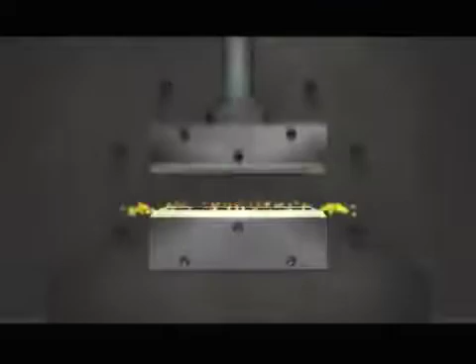Hi, I'm Larry Postlethwaite, President of the Crosby Group, and I take great pleasure in introducing you to our company through this series of video presentations. In large measure, these videos are about quality, Crosby quality, quality from the way our products are designed to the way they are manufactured and distributed. Let's look briefly at what we call Crosby quality.

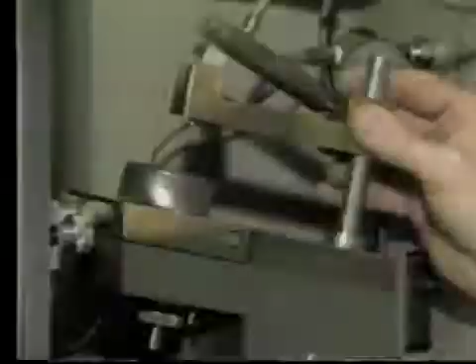Crosby means quality first in research and development, using one of the most experienced technical staffs and best equipped laboratory facilities in the industry. Crosby R&D is constantly developing new or refining further products to expand the performance of our product line. Crosby also stands for quality in engineering and manufacturing. All Crosby products are engineered to provide performance that often exceeds industry standards, and Crosby products are manufactured and tested stringently to ensure their reliability.

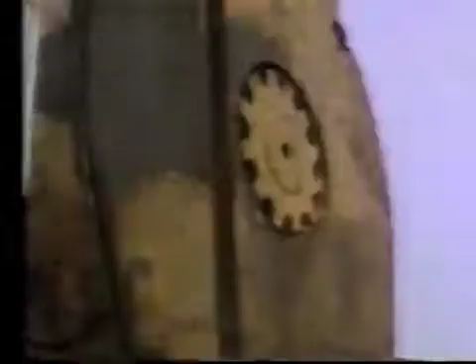Our quality is also reflected in the depth of our product offering. The Crosby product line is truly a complete product line. From scaffold pulleys to the largest load lifting blocks ever made, from the smallest world-famous Crosby clip to the largest wire rope sockets made, from a 1/3 ton capacity shackle to the exclusive 1,500 ton capacity wide-body shackle. Truly a full line of products for handling and securing loads.

Crosby quality also extends to our relationship with customers and end users. Crosby customer service is constantly striving to become among the most responsive in the industry. We stand ready to answer your purchasing questions as well as supply technical information about products.

And finally, Crosby means quality to our valued distributors and end users in terms of liability prevention. Load-rated products, product traceability, and training videos are a few features used. We believe Crosby quality must also extend to product warnings, ensuring that men and women who use Crosby products can use them with confidence. Remember, when buying Crosby, you're buying more than product, you're buying quality.

The following program is on the basic principles of block and tackle. One of the most effective work systems for moving loads is the block and tackle. Certainly not a new work system. They were key to building the pyramids a few thousand years ago. Block and tackles are among the most frequently used work systems today.

This training video will familiarize you with the basic principles of block and tackle systems, how they work, and how to select proper components to ensure your safety and the safety of your load. The information we'll discuss in this video has been available from the Crosby Group in our publications for many years. We're providing it here in video as a further service to our customers.

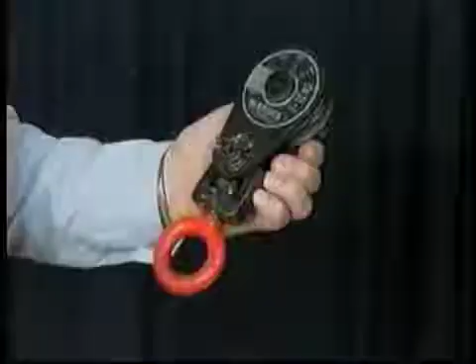The word block refers to the part of the work system you see here. The block consists of one or more sheaves or pulleys within a holder or housing which may have an eye, hook, shackle, or hanger attached to it. The sheave or pulley inside the block housing is a wheel that rotates about its center pin or axle.

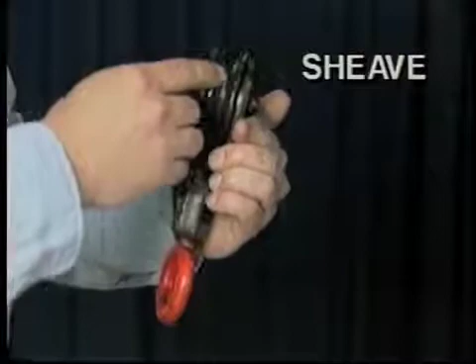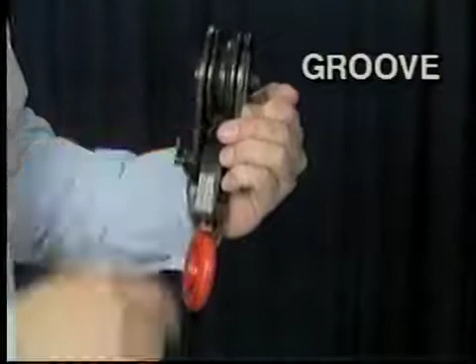Another important part of the sheave's design, and one that plays a key role in maintenance and inspection of a block and tackle, is the groove around the outside of the sheave that you see here. The purpose of this groove is to support the wire rope, which we call the line, and keep the line from slipping off the sheave.

The term tackle in a block and tackle system refers to any parts of the system outside of the block. So, such equipment as hooks, shackles, slings, eye bolts, wire rope, and so on are all referred to as tackle. While we're defining block and tackle terms here, there are two others you need to be familiar with. These are reeving and pitch diameter.

Reeving is the physical arrangement of the wire rope or line from one block to another and to the power source, such as a winch, being used to lift the load. Pitch diameter means the diameter of the sheave at the lowest point of its groove, plus one rope diameter.

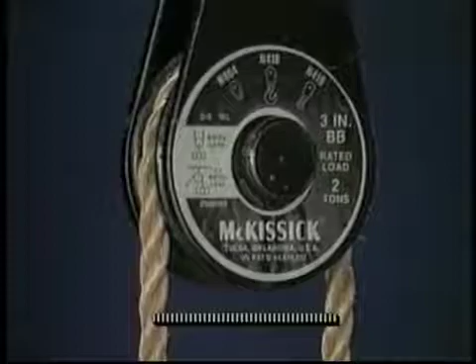Another way of thinking about or measuring pitch diameter, then, would be from the center line of one rope end to the center line of the other rope end as it goes around the sheave. As we'll discuss later, pitch diameter is key in terms of the stress placed on the wire rope as it bends around the sheave. The sharper or tighter the bend, the greater the wear, and therefore the shorter the life of the wire rope. To extend the life of wire rope, we increase the ratio of pitch diameter to wire rope size.

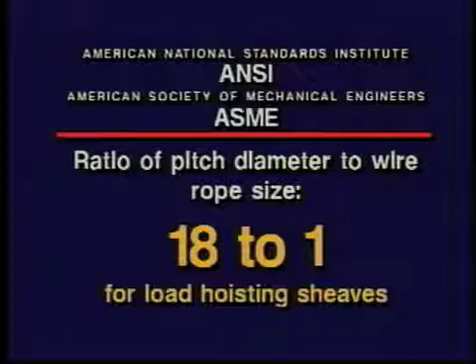For example, the American National Standards Institute, ANSI, and American Society of Mechanical Engineers, ASME, Joint Safety Standard calls for a ratio of pitch diameter to wire rope size of 18:1 for load hoisting sheaves. Now this, of course, is a general guideline for a specific application. We recommend consulting with your wire rope manufacturer.

Now that we've described the parts of a block and tackle system, let's look at how the system can be arranged and used safely and effectively to increase the result of our effort, giving us what engineers call a mechanical advantage. The advantage of using multiple sheaves in a block and tackle system is that we can combine them in various ways to create a variety of work systems. In a nutshell, the more sheaves we use correctly in a block and tackle system, the more we can increase the result of effort. We'll discuss and demonstrate the effects of multiple sheave systems a little later.

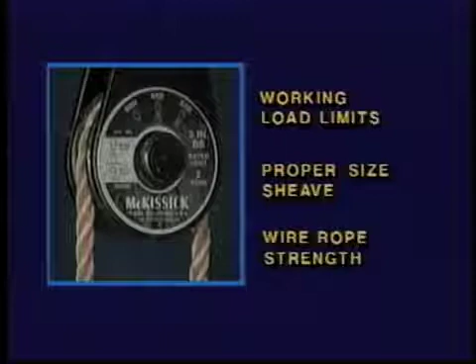For now, let's make sure we fully understand how a basic block and tackle works by looking at a single sheave block. Please pay particular attention to the safety aspects of our discussion as we go along. Remember, a block and tackle system is effective only to the extent that it is safely designed, used, and maintained. The single sheave block and tackle system is the simplest in design and probably the easiest to understand. Even here, however, care must be taken. We must select blocks with proper working load limits and proper size sheaves, as well as wire rope of proper strength, size, and other tackle parts to avoid an accident or damaged load.

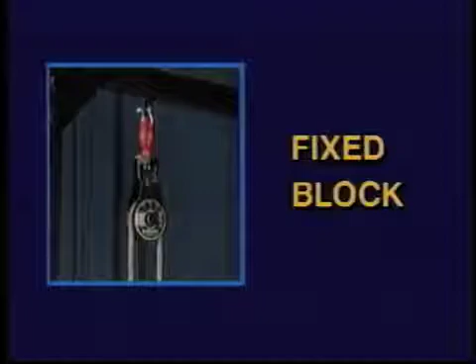If we decide to attach the block to a solid support beam, as you see here, we call this a fixed block design. Now, as we'll demonstrate in a minute, this block and tackle system does not increase the result of our effort. That is perhaps a simple but important fact to understand. If we're trying to lift, say, a 300-pound load, as we're representing this to be here, we're going to have to provide 300 pounds of force to lift that load. You might ask then, why even use a single sheave block and tackle? The answer is because it will give us an easier way to apply that 300 pounds of effort.

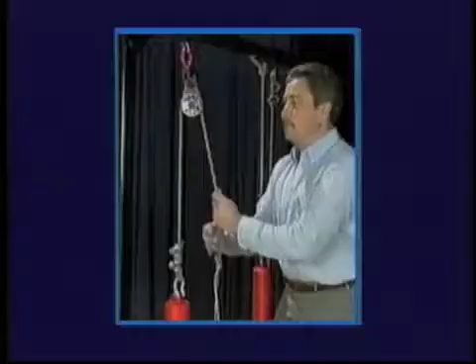In the demonstration you see here, pulling down is easier than pulling up. Much like the way those of you with farm experience learned that lifting bales of hay up to the loft was easier when using a block and tackle. Many other applications of this same principle are used in shipyards, construction sites, manufacturing plants, and so on. This design allows us to remain on the same level as the load and pull down, a far easier use of our effort than getting above the load and trying to lift it up directly.

While accidents can result from poor inspection or maintenance practices, like working with worn ropes, damaged sheaves or blocks, disfigured hooks, and so on, accidents can also result from selecting the wrong capacity blocks or tackle to begin with. That is, failing to use the proper capacity winch, choosing wire rope with too low a breaking strength, or selecting the wrong capacity blocks or sheaves.

Looking again at our demonstration model of the single sheave fixed block design, and remembering that we're representing the load to be 300 pounds, what minimum capacity block should we use? What do you think? Should our block be able to support a minimum load of A, 150 pounds, B, 300 pounds, or C, 600 pounds? If you answered C, 600 pounds, you're right. In this case, our block will have to support a minimum of 600 pounds of weight or force.

Now, if you answered incorrectly, don't feel all alone. Many an experienced mechanic or tow truck driver or weekend sailor has made a similar wrong decision where it counted, on the job. Let's take a closer look at our demonstration model to see why the block in this case must be able to support twice the weight of the load. Notice what is happening here.

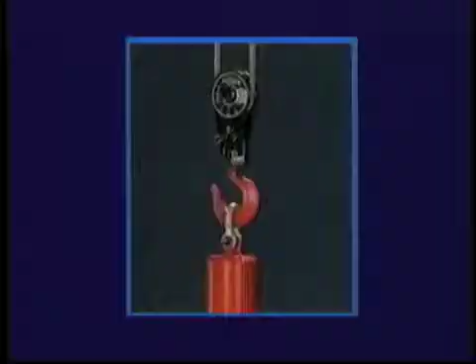Now, let's take a look at a second single sheave block and tackle design that demonstrates this point. Here, as you see, our block is not fixed to a solid support, as it was in our first demonstration. Instead, we've attached one end of our line to a solid support. We've reeved the line around a single sheave in the block, which in turn is hooked directly to the load. We're applying our effort by pulling up on the other end of the line. What we have now is a traveling block single sheave design.

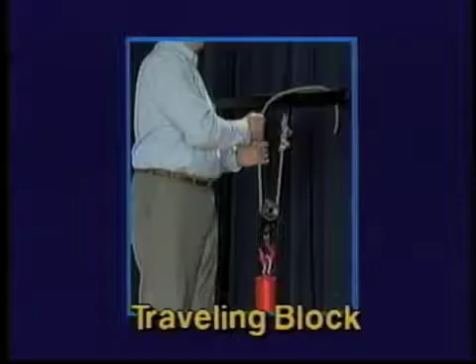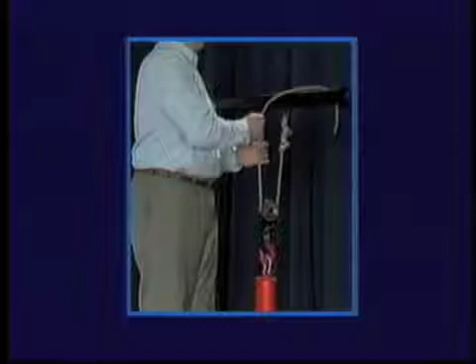In terms of the effort required to lift the load, this block and tackle system has a distinct advantage over our first example. Before we demonstrate this advantage, can you see what it is, based on your block and tackle knowledge thus far? If you answered that this design will require only half as much effort to lift the load, you're right. If you look carefully at this operation, you'll see that as we pull up on the line, the traveling block and load are moved up as well, and we're moving the load with half the effort, because the other part of line we fixed to our solid support is supplying the other half of the effort required.

Now, rather than having to apply 300 pounds of force to lift the 300-pound load we're representing, we only have to apply about 150 pounds of force. The fixed line is applying the other 150 pounds. It's the equivalent of having another worker lifting the load along with us. We see then the importance of understanding parts of line when designing a block and tackle system.

Essentially, the more parts of line we use, reeved through a combination of blocks and sheaves, the greater amount of weight we can move with the least amount of effort. The overall amount of work done will, of course, remain the same. In our first demonstration, we moved our 300-pound load 1 foot by pulling 1 foot of wire rope with 300 pounds of force. Here, we've only had to apply 150 pounds of force. But in order to move the load 1 foot, we've had to pull 2 feet of wire rope.

There's a trade-off, then, in gaining this mechanical advantage. That trade-off is in terms of the amount of wire rope or line required to make the lift. This trade-off is small, however, compared to the great mechanical advantage this block and tackle system gives us. Specifically, you saw that in this second case, we've had to pull twice as much rope to move the load a certain distance as we did in the first case.

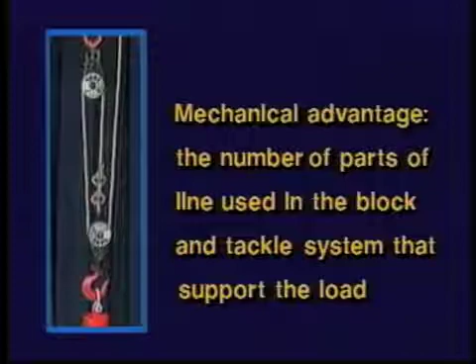A good working definition of mechanical advantage, then, is the number of parts of line used in the block and tackle system that support the load. The more parts of line we have directly supporting the load, the greater is our mechanical advantage.

For additional technical information on this point beyond the scope of this training, bearing friction, for example, please see Crosby's technical literature. For our purposes here, remember this parts of line concept when deciding upon your block and tackle system design. It's the parts of line that is key, not necessarily the number of blocks or sheaves used in the system. To reinforce this point, take a look at this block and tackle system.

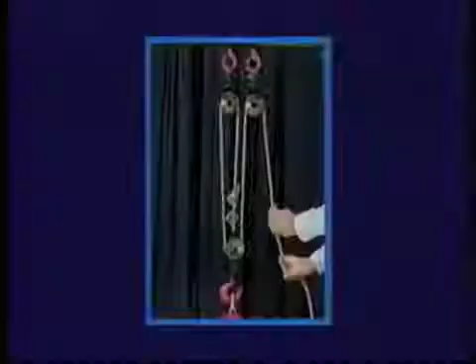Here, we've used 3 blocks, 2 fixed and 1 traveling, and our power source is pulling down on the line. Now, even though we've introduced another block and sheave into the design, we still have only 3 parts of line directly supporting the load. Both of these last 2 block and tackle demonstrations, then, used 3 parts of line.

Keeping in mind what mechanical advantage means, how much effort is required at our power source to move the 300-pound load we've represented? A, 300 pounds, B, 200 pounds, or C, 100 pounds? The answer is C, 100 pounds. Again, an overall total of 300 pounds of force is required, but now the remaining 2 parts of line supply 100 pounds each, making up the 200 pounds of additional force we require. We have multiplied the effect of our own effort 3 times.

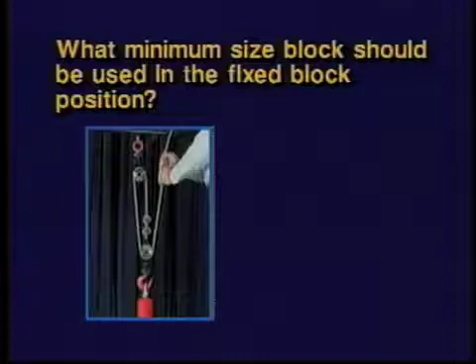In a few minutes, I'll give you a procedure, a formula, for deciding upon the parts of line needed for a given load. Before we get to that, however, let's reinforce some earlier points about the selection of proper capacity blocks. Looking at our first 3 parts of line design here, what minimum size block should we use in the fixed block position? A, 100 pounds, B, 200 pounds, or C, 300 pounds? The correct answer is B, 200 pounds, because that is the amount of weight or force bearing directly on the block, 100 pounds from each part of line reeved around the sheave.

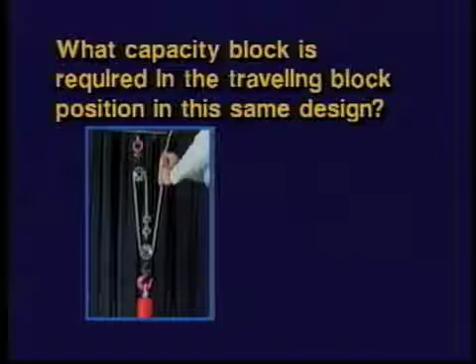Finally, what capacity block is required in the traveling block position in this same design? A, 100 pounds, B, 200 pounds, or C, 300 pounds? Here the answer is C, 300 pounds, since this block is directly supporting the load, which we've represented as 300 pounds.

Now, before moving to the last portion of our training on basic principles of block and tackle systems, let's take a couple of minutes to review what we've discussed so far. First, we use block and tackle systems to gain a mechanical advantage, to increase the result of our effort in moving a load. Second, we must use blocks whose capacity is equal to the total weight or force they will bear. That is, the force of the load itself, as well as the force coming from the power source as it pulls on the line.

Third, we must select sheaves whose pitch diameter is appropriate to the specific lifting application. This, as we stressed earlier, is an important safety consideration.

And fourth, we must use sufficient parts of line, sections of wire rope directly supporting the load, to accomplish the lift. Here we said 2 factors must be considered: 1, the weight of the load, and 2, the amount of effort we can expend. Using these 2 factors to determine the parts of line we should have is really quite simple, and it brings me to the formula I mentioned earlier.

To determine required parts of line, we just divide the weight of the load by the amount of effort available. For example, if we have, say, only 75 pounds of force available, and have a 300-pound load to move, as we've been representing in our demonstrations, we will need 4 parts of line. 300 divided by 75. Load weight divided by applied effort gives us the required parts of line.

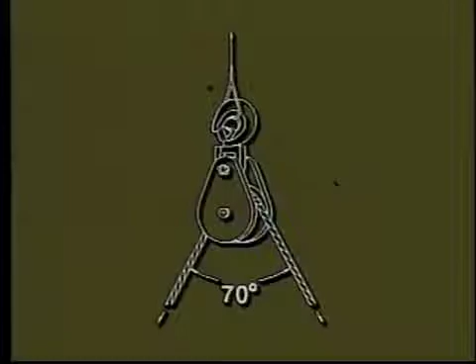Any angle less than 180 degrees, a straight line, is going to change the direction of force and the total load value placed on the block, either increasing or decreasing that force. In this case of 70 degrees, the angle will increase the force of the load by almost 2/3, 64% to be exact. So if we were lifting a load of, say, 1,000 pounds,

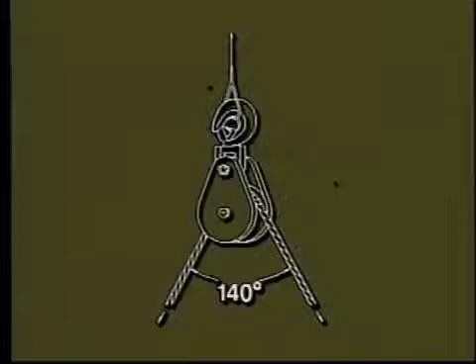the total load value on this block would be 1,640 pounds. On the other hand, if the angle between the incoming and outgoing line segments was double the earlier angle, that is 140 degrees, the load value on the block would be decreased by about 1/3, reducing our 1,000-pound load to a load value of 680 pounds. Now, if you're worrying about having to work out the math every time you're doing a job, relax. Engineers have done that for you.

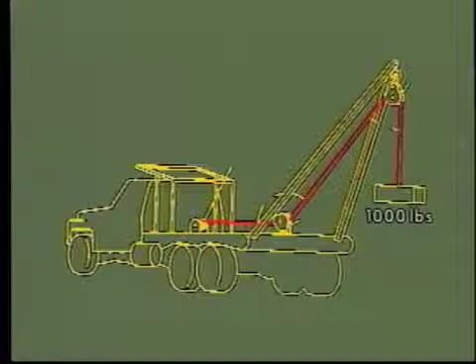Now, as you'll recall from our discussion on parts of line, this is a single part load line system. So we have no mechanical advantage. That is, the winch line pull will be 1,000 pounds, equal to the weight being lifted. Now with that knowledge, along with understanding the effects of line angle through the blocks, we can figure the total load value bearing on each block. To help us in this process, we'll use the angle factor multiplier table we looked at a few minutes ago.

Let's first consider the toggle block on the flatbed. Here we see that the angle between our line segments as they enter and leave the block is 135 degrees. Now before we look at our table for the specific multiplier we'll need, what do you already know about that multiplier? Will this 135-degree angle increase or decrease the total load value on this block? Right, it will decrease the total load value, almost as much as our earlier example using 140 degrees of angle.

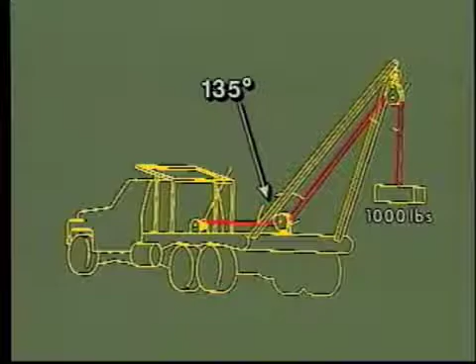In looking at the table, we see that the specific multiplying factor is 0.76. In other words, the total load on the tackle block in this system will be 760 pounds. We determined that by multiplying our 1,000-pound line pull on the block times the 0.76 angle factor from our table. Therefore, the working load limit rating of this block must be at least 760 pounds.

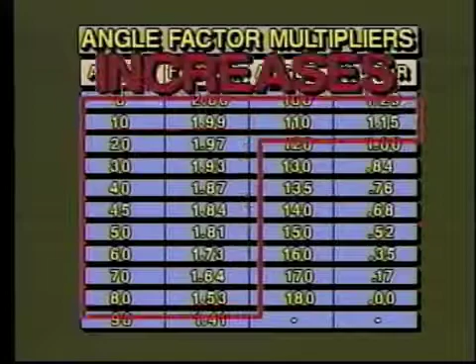Looking at the table a bit closer, you can see that any line angle wider than 120 degrees will decrease the total value of the load on the block, while angles narrower than 120 degrees will increase the load value. So, if you're going to remember one basic fact about the effects of line angle in a block and tackle system, this should be it. Any angle wider than 120 degrees decreases total load value on the block, and any angle narrower than 120 degrees increases total load value on the block.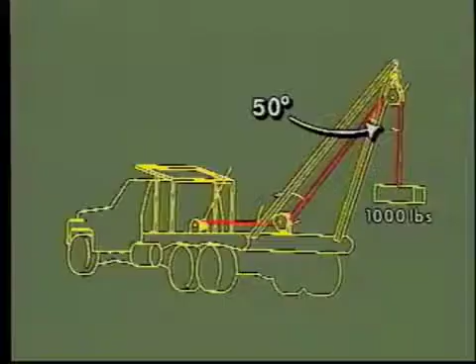To complete our discussion of the gin pole truck operation, let's look at the second block in the system, the snatch block at the top of the gin pole. Here, the angle between incoming and outgoing segments of line through the block is 50 degrees. We know already that this angle will increase the total load being supported by the block because the angle is narrower than 120 degrees. And as we see in our table, the load will be increased by a considerable amount, 81% to be exact. Now what this means, of course, is that the total force on that snatch block will not be just 1,000 pounds, the weight of the load itself, but rather 1,810 pounds due to the effect of line angle as it enters and leaves the block.

In practical terms, the operator of this gin pole truck is going to need a snatch block with a working load limit rating of about 2,000 pounds to pull that 1,000-pound car or whatever. Any less block capacity may ruin the block, damage the load, and most important, risk injuring a fellow worker or bystander.

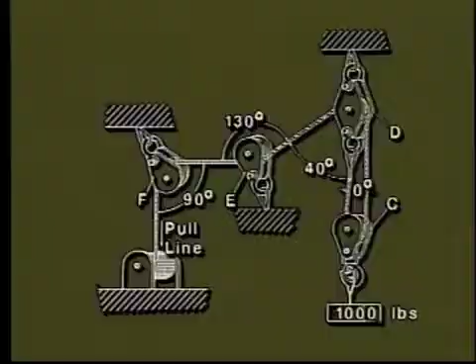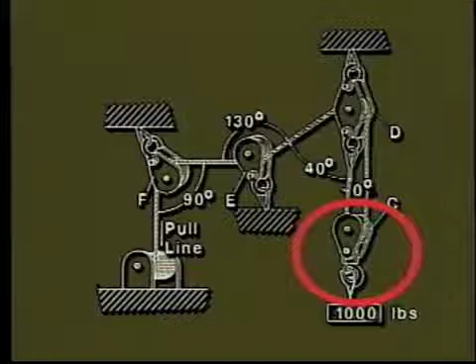Finally, let's see how to determine total load values for block and tackle systems using traveling blocks. In contrast to our gin pole truck example, which used only fixed blocks, here we've diagrammed a hoisting system using a traveling block. A traveling block, as you know, always gives us a mechanical advantage because more than one part of line is supporting the load.

Along with this traveling block, we're using a winch and 3 single sheave blocks to complete our block and tackle system. Again, our load in this diagram represents 1,000 pounds. Now, however, since we have a mechanical advantage of 2, thanks to our traveling block, our load line pull will be only 500 pounds. That is, the weight of the load divided by our mechanical advantage of 2.

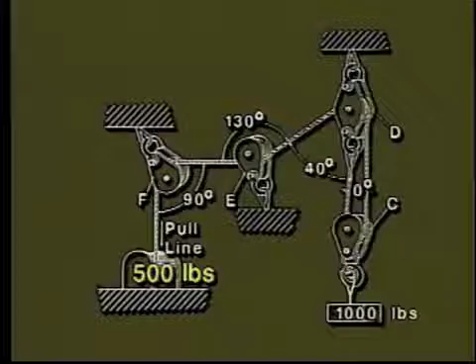Using these facts and our table again, let's figure the total load value bearing on each block in this hoisting system. Looking first at the block nearest the winch, we see that the angle of line segments entering and leaving the block is 90 degrees. To determine the total load value on this block, we multiply the line pull of 500 pounds times the factor for a 90-degree angle, which as you see is 1.41. This gives us the total load value of 705 pounds. So, this block must have the capacity to support 705 pounds of force.

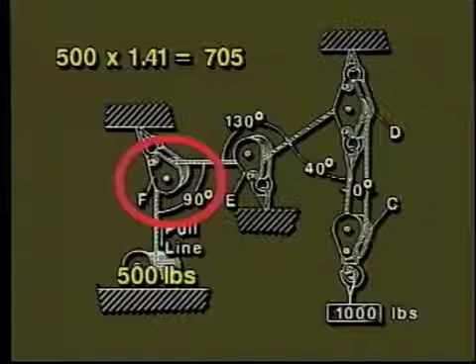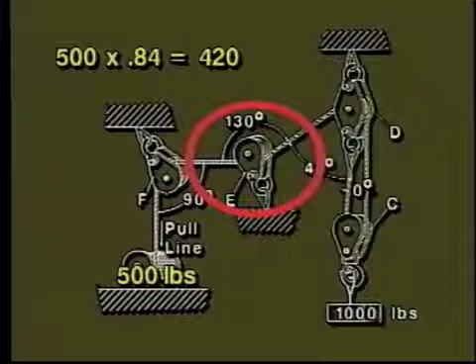Following our line along to the next fixed block, we see that the line is entering and leaving this block at a wider angle of 130 degrees. We know immediately that since this angle is wider than 120 degrees, the total load on this block will be decreased. And, as we see from our table, that is the case. Here, our multiplier is 0.84, which times our 500-pound line pull gives us a total load value of 420 pounds. So, the working load limit rating of this block must be at least 420 pounds.

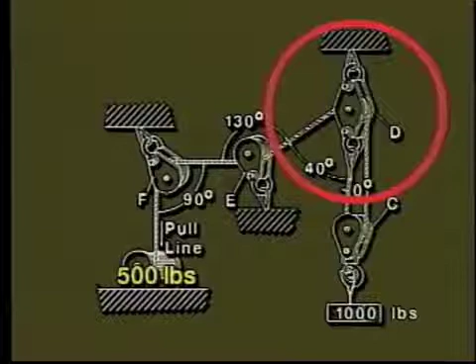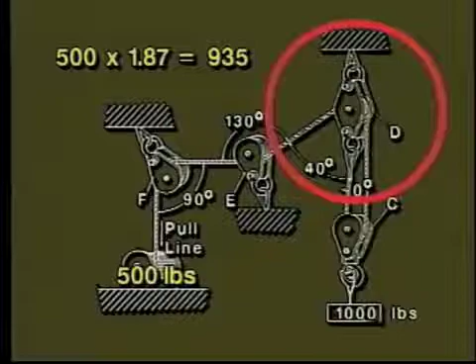Our last fixed block must be looked at closely to accurately determine the total load value it must bear. Here you see that our wire rope or line has been dead-ended or terminated and attached with a shackle to the bottom of the block. This dead-end load value must also be taken into account when we figure total load value on the block. Let's see how. We know that our line pull is 500 pounds. We also see that the line angle as line segments enter and leave this block is 40 degrees. Our table tells us this angle requires a multiplier factor of 1.87. That means that the angle and line pull together are going to place a load of 935 pounds on this block. That is 500 pounds of line pull times our angle factor of 1.87.

But very important, since we've dead-ended our line at the base of this block, we must take that fact into consideration. In other words, this block is supporting not only the 935 pounds we've calculated so far, but also another 500 pounds of dead-end weight coming from the load itself. When we add this dead-end weight to the 935 pounds, we see that this block must have the capacity to support a total load of 1,435 pounds.

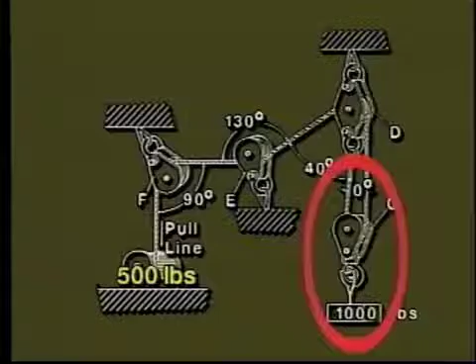Finally, let's focus on the traveling block, which is attached to the load with a latch-type hook. You'll note, by the way, that the loop of the sling holding the load is seated properly at the inside base of the hook. This is an important safety consideration. Never allow the load to be supported by the latch. Always make sure the hook is supporting the load.

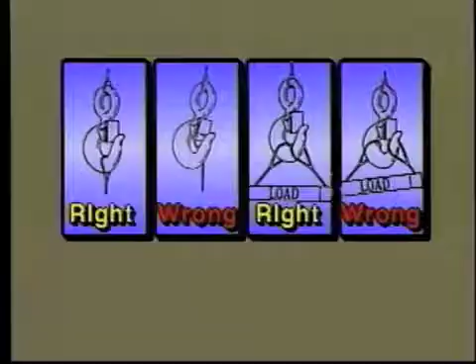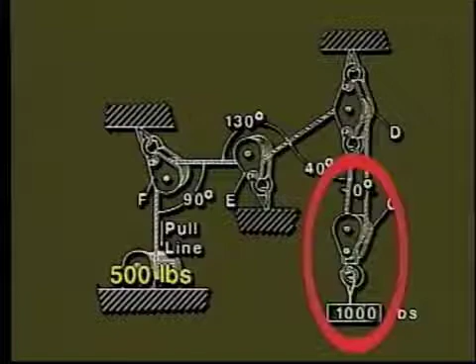To determine the total load on this traveling block, we'll again be multiplying our 500 pounds of line pull times the factor for the angle of the line section entering and leaving the block. But look carefully here. As you see, we have no angle. The line segments entering this block from the fixed block above it, going around the traveling block sheave and returning to the fixed block, are parallel to each other. The line angle in this case, therefore, is 0 degrees.

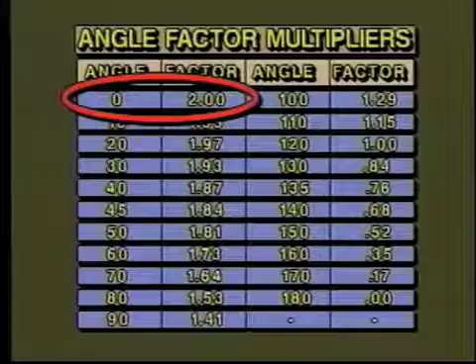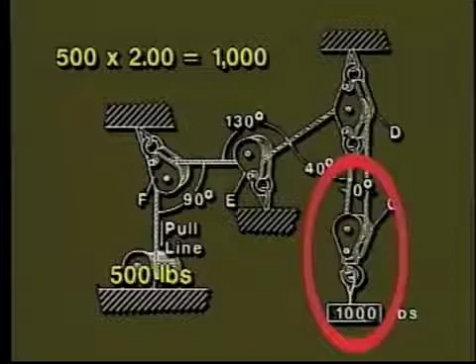Now, looking at our table, we see that this 0 degrees angle has a significant effect on the total load value. It doubles it. When we multiply 500 pounds of line pull times this factor of 2, we see that our total load value is actually 1,000 pounds. This traveling block must have the capacity to support 1,000 pounds.

Well, that about does it. We hope this introduction to the basic principles of block and tackle systems has been helpful to you.